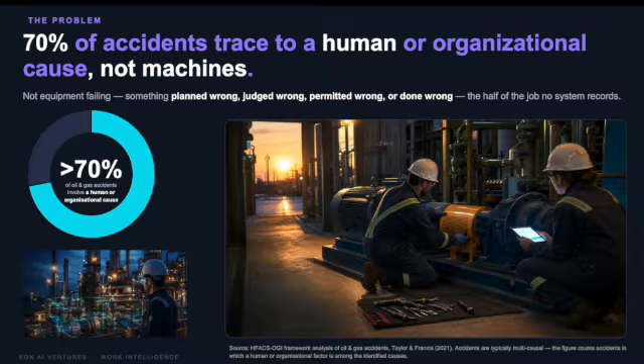Here's the good news in one way: we can do something about it. 70% of accidents trace to a human or organizational cause, not the machine. And if you break that problem down, it's actually not one problem, it is 7. Let me talk about those 7.

The most common one is that the procedure was never practiced. The crew was doing this procedure for the first time. That happens in oil and gas, in mining, and many other areas. We address that by having a simulator called Genesis that practices the exact procedure on a digital twin of that plant, very similar to what we do for aircraft with aircraft simulators.

The other issue is that we lose experience constantly. The person who knew how to fix that particular issue retired in March. We address that by having something that captures that knowledge before it leaves. We call it EON Tacit. It captures what they know, checks it, and lets any worker get access to that information instantly.

The third issue is when things go wrong. So you practice for the perfect situation or ideal scenario, but you haven't practiced for the bad day. That's what we can address by rehearsing things when they go wrong, in something we call EON Live. It has real physics, and if you turn the wrong knob, it will react as it would in reality.

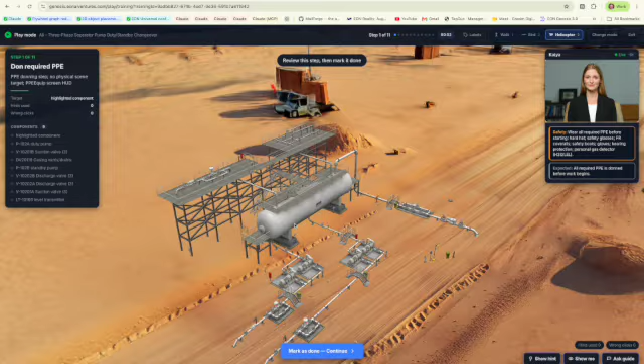Wear your hard hat, safety glasses, gloves, and other required PPE to keep yourself safe before starting any work on the system.

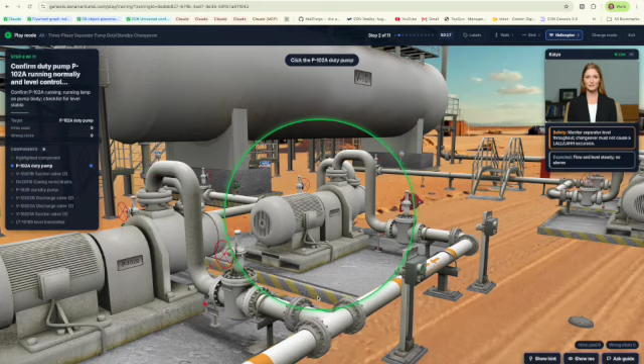Check that P102A is running properly and the level control is stable, since this is vital for preventing any level alarms during the changeover.

Opening V1201B, the standby pump suction valve, fully is essential for a smooth changeover, ensuring the pump can operate properly when needed. Open the casing vent on DV20110 just enough to see continuous liquid, then close it to prime the standby pump.

P102B is your standby pump. First, make sure the discharge valve is closed before you start it up for safe operation.

Okay, so now you can see that I was in control here. Slowly open the standby discharge valve and keep an eye on the flow and discharge pressure. This is crucial to ensure everything is working as it should.

Okay, so I will not do the demo myself for the next step. This is something you can do yourself, or I'll attach a video of how these things were created.

Okay, so let's go to next. Now, to have all that, we need to have a library. So we have a vast library, actually the world's largest in this field, that covers more than 8,000 components: oil and gas components, mining, medical, and many others.

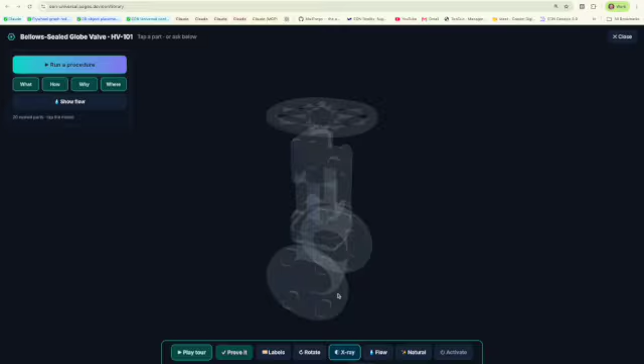And I can pick any component. Let's take one here, let's take this one. And I can see it, how it works. I can X-ray it, I can of course rotate it. I can label the components, get the X-ray back, turn off the labels, see the flow related to this. If not, understand more about it, play a tour and see how this works.

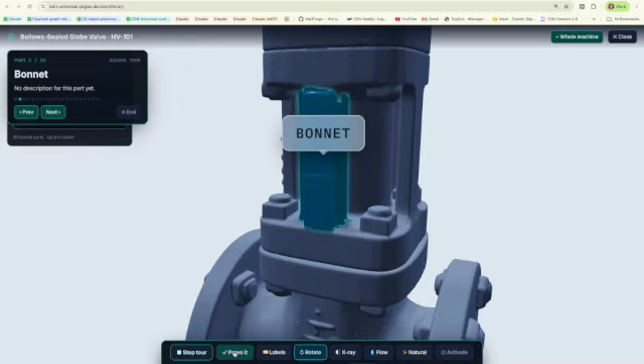I can also stop that and stop rotation, look at the parts here, and close it and run a procedure.

For example, operation: verify line conditions match the valve's intended service before operating. Open or close the valve slowly using the hand wheel or actuator to avoid water hammer. Catching abnormal vibration, leakage, or heat early prevents a much bigger failure.

So this is the building blocks that are then utilized when you want to build something from scratch, right? You have various components, so that is a part of Universal. We also have a part where you can simply take pictures and then convert those pictures into a full plant.

The next thing is two things here. There's something called EON Tacit, and that's the lost experience. I'm not going to go into that. We have the permit, but I want to go to something called EON Live.

This is pretty exciting. So now the difference is that instead of having the perfect situation, you can actually simulate what happens if it goes wrong, because this has real physics engines. So let me show you what I mean.

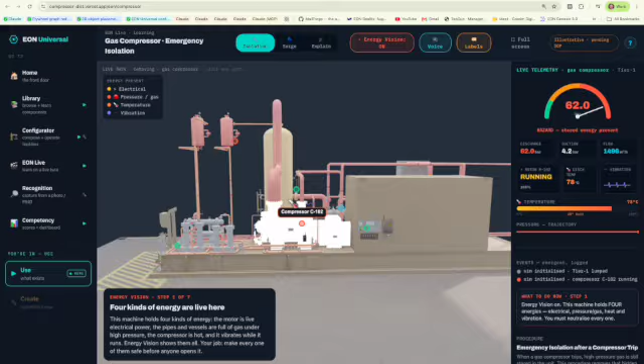Four kinds of energy are live here. This machine holds four kinds of energy. The motor is live electrical power. The pipes and vessels are full of gas under high pressure. The compressor runs hot.

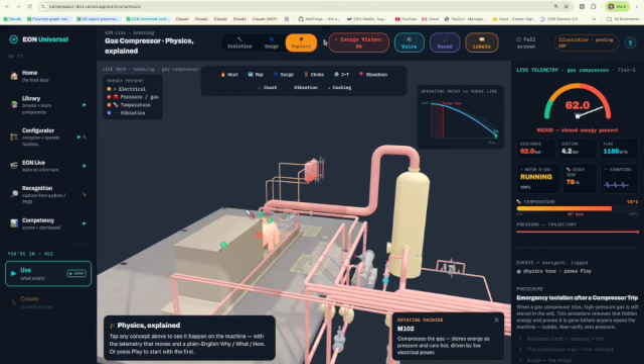Okay, so I can stop that, and if I want to understand what drives this, you can see, for example, heat: hot gas and hot metal can burn you. Squeeze a gas and it gets hot, like a bicycle pump getting warm. The compressor packs the gas tighter, so its temperature climbs to about 78 degrees.

I can see what a surge means. Surge can wreck a compressor in seconds. Starve it of flow and it coughs the gas backwards, violently. You must remove the trapped energy before opening.

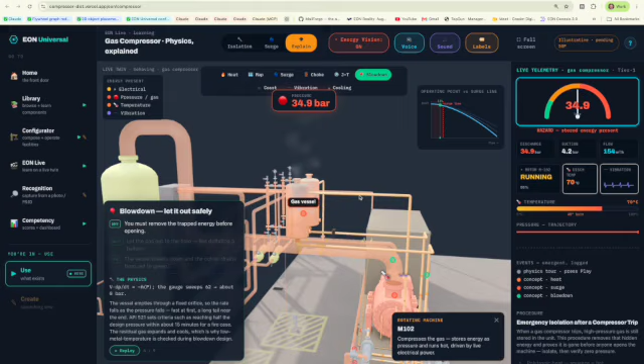Let the gas out to the flare, like deflating a balloon. The vessel bleeds. The machine is not instantly safe when you hit stop.

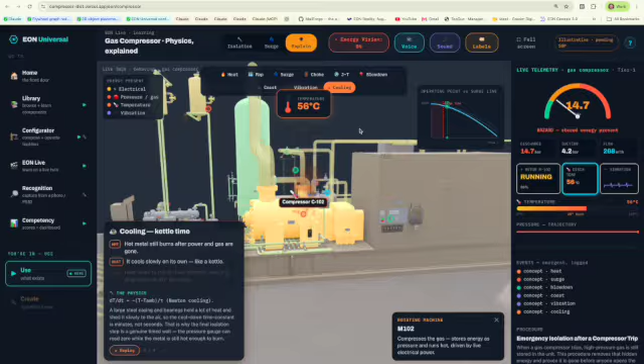Cut the power and it keeps spinning, like a bike wheel. The shake tells you if it is healthy or sick. Hot metal still burns after power and gas are gone. It cools slowly on its own, like a kettle.

So you can see, you can explain it, and then you can go through a process, running with surge margin to spare. A compressor lives on a curve, head against flow.

So that enables you to then create numerous applications, and I'll show you just one or two. We have something called a situation room. These are real accidents that actually happened, and we drive them with EON Live, what you just saw here.

So for example, if I take oil and gas, and if I put here, let's listen in, you can see that we have the deadliest accidents. And now with that in hand, you see the deadliest accidents, you see the most frequent ones, and as I'm holding my thumb, you can actually see an enactment of those accidents.

You see the top picks for you, you see flagship disasters. If I pick one, for example, heat exchanger, for that I will be able to see a live simulation. I can ask Brainy about this particular situation here. I can talk with Wayne. Wayne is one of the specialists that has been there, seen this.

Hi, I'm Wayne, and welcome to the Situation Room. This lesson is about heat exchanger, reactor cold restart transient. Together, we'll learn to recognize the warning signs, understand what can go wrong, and act before the situation escalates. Are you ready to begin?